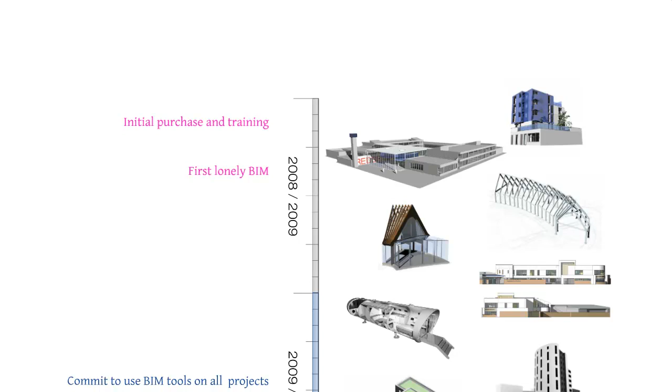We started in 2008 with some initial training and went straight into a small £1 million residential building using the software to simply produce the drawings. We repeated this process a number of times on increasingly larger projects. However, we were still falling back into CAD on refurbishment projects, and sometimes if we were under intense time pressure.

At the end of 2009, we committed internally to use BIM tools on all projects, almost as a matter of principle. At this point, we hired an in-house trainer and BIM champion, and this led us to our first collaborative models.

Our BIM champion developed a very intensive 6-day training schedule, broken down into 40-minute modules, so there were lots of opportunities and no excuses for everyone to do the training. That's now been followed up by BIM Boot Camp for new starters, which involves really intense training with no distractions in their first week with us.

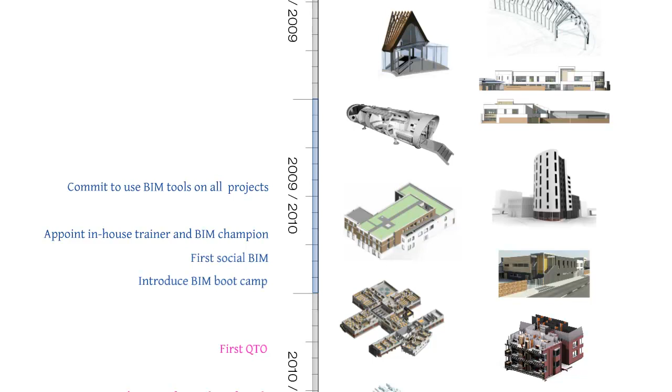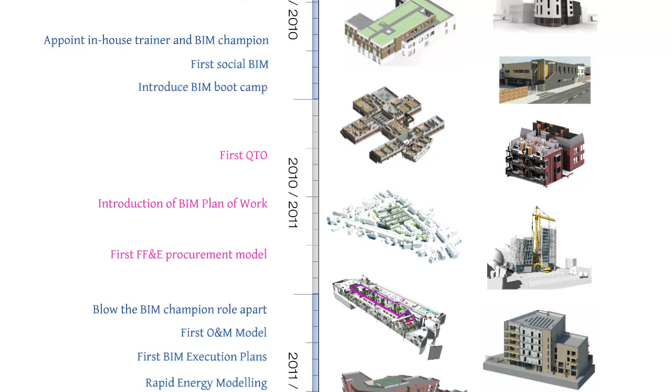More recently, we've been producing QTOs, or quantity takeoffs, and we've developed an FF&E procurement model linked to another system called Codebook for our school projects. This has led us to changing how we're modelling, so our output is now more aligned with our clients' needs.

In the last year, we've blown the BIM champion role apart, with individual members of the team taking responsibility to explore different parts of the process and share their experiences, and this was a sign to us that BIM was maturing within the practice. In turn, this has led us to our first BIM execution plans, our first facilities management models, rapid energy modelling, rapid cost modelling, and larger and more complex projects.

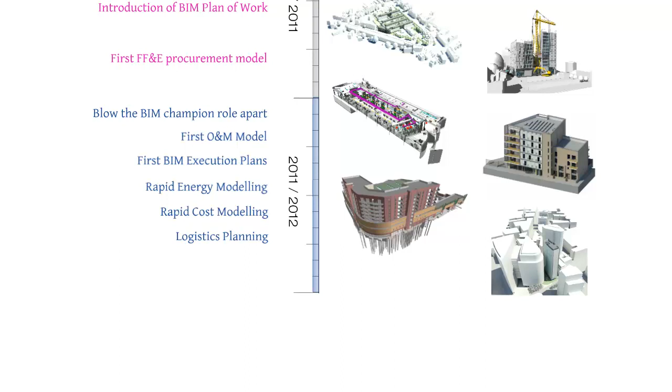During this evolution, we've also developed our own in-house BIM manual and a BIM plan of work, which define inputs, processes and outputs for each RIBA workstage. However, this has now all been superseded by the RIBA's BIM overlay and PAS 1192, which gives everyone a standardised approach to produce information and enabling them to share it.

So, how much does it cost? We've calculated about £10,000 per workstation. This includes software, hardware and training. So for a small practice it is a big investment. We've been spending around £30,000 a year over the last 4 years. This felt like a lot, especially early on when we were only 4 people.

So what has been the benefit to the business? We're definitely doing more for less, or, put more accurately, we're offering more for the same. We're sure that this has given us a competitive advantage in winning work. Being able to offer additional services has differentiated us in a difficult market.

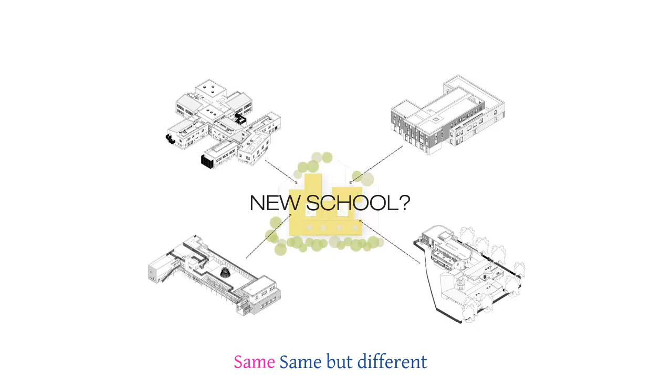The new process is encouraging collaboration at a micro and macro level and refocusing the team on the end product rather than just project trackers and compliance reports. The virtual building is on the team's monitors and the office projector screens constantly. Design team meetings have become much more productive, with issues being resolved in the meeting rather than being taken away.

The quality controlled output has also given our team confidence. BIM tools have reduced the drudgery of production of information, enabling our staff to punch way above their weight, which in turn has improved the team's motivation. And importantly, stakeholders can see exactly what they're going to get, which is managing their expectations and smoothing the project through the review and approval process.

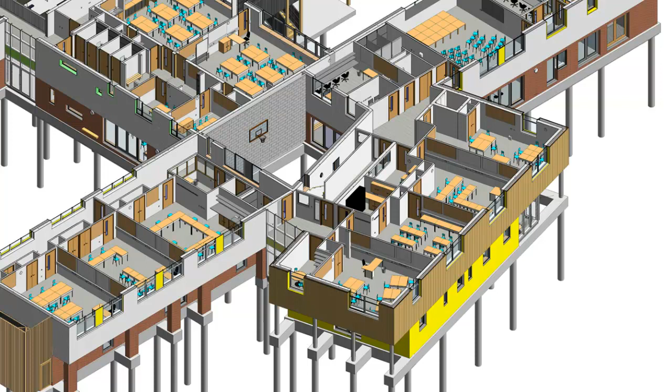Again, this is working for us as a single source of information at a macro and a micro level, whether it's agreeing small power locations or signing off planning conditions. As a bonus, the new workflow has simplified design management and allowed us to build our internal processes around the BIM.

This has actually had a great impact on our external accreditations as well. ISO 9001 Quality, ISO 14001 Environmental, and Investors in People were all positively affected by our BIM processes. In particular, the environmental accreditation, where the assessor was particularly impressed by the potential of BIM to reduce waste.

Our current challenge is to move our office management and our output onto the cloud, making it potentially accessible everywhere. We're all looking forward to snagging on site using the model on an iPad over the 3G network.